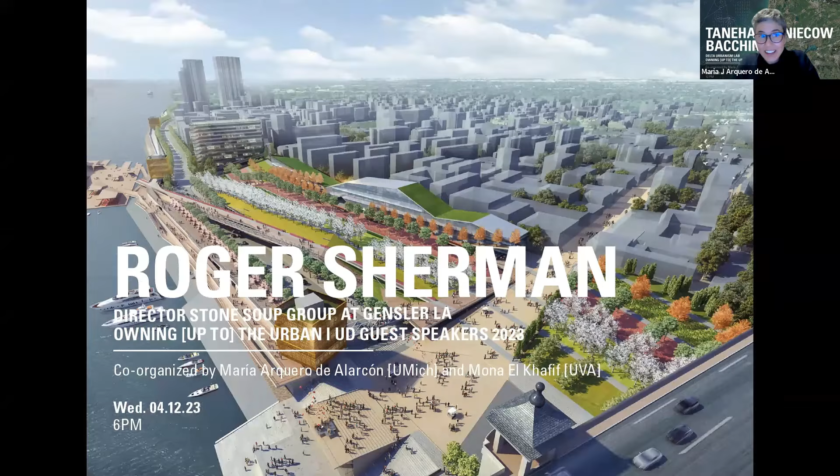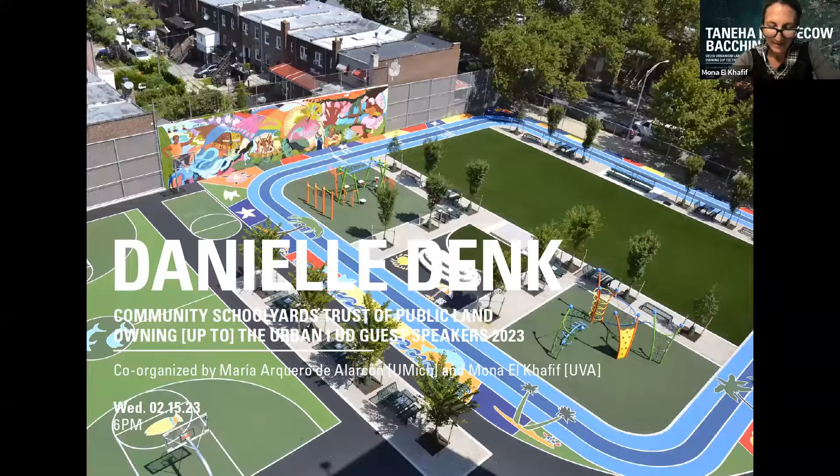So Mona, you can take it from here. Yeah, welcome everyone. This semester, we are specifically interested in featuring novel organizational infrastructures in which the design disciplines reassemble, and to devise experimental approaches in urban design to capture its complexity and uncertainty.

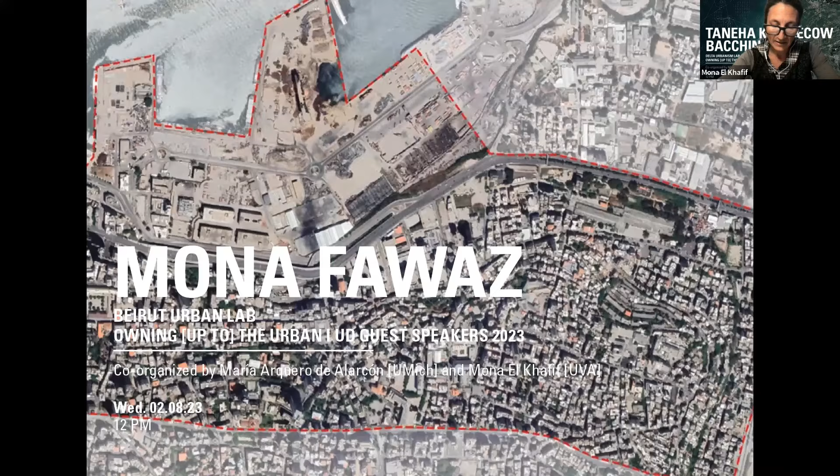This is the second lecture series. The last round, we were looking at and inviting colleagues, researchers and scholars who were implementing one-to-one projects. This year, we are inviting our colleagues from labs, very often embedded in the context of academic institutions, non-profit organizations, or large professional firms. Labs, centers and clusters are very often productive configurations where research methodologies and strategies can be experimented with, challenged and innovated.

So in our lecture series this year, we are going to be examining the formation of 7 organizational units, and you can see them rolling on the screen, starting today and going on up to 7 of them. And the guest speakers are going to be sharing with us what are some of the operational logics of these units, the work that is emerging from them.

We have invited them to discuss their projects in their temporal and spatial logics, how they are accessing funding and resources, and what are some of the strategies that they are using to engage diverse publics and ensure that they are advancing different strategies of co-production in many instances.

We prompted all speakers to address specific questions in their presentation. Among those questions: about agency, methodology, the actors that are involved, actions that they are taking, the way how their projects are funded, and how their work could be replicated in other places globally.

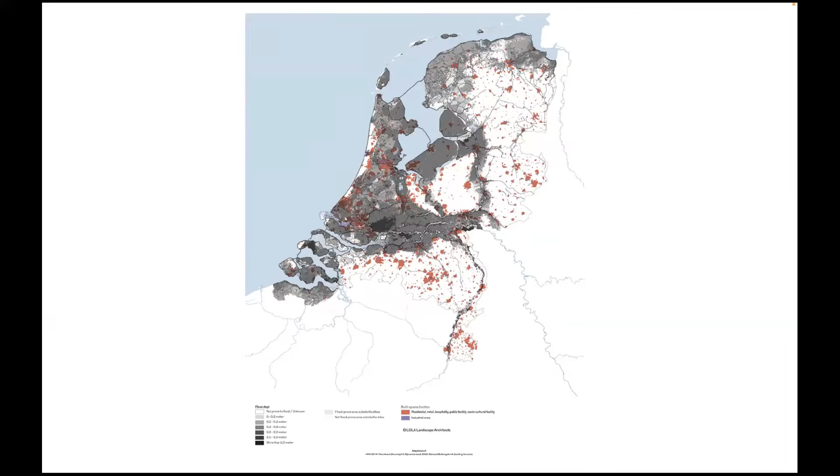...actually the sea level. So most of the country is under sea level, and you can see in red the urbanizational spots. The Netherlands is a very high density country—quite dense population, with 60% living under the level of the sea.

So in case the dike breaks, we do have quite a major problem. But at the same time, it's a very fascinating thing to be in the Netherlands, because you realize the Netherlands is a country that does not accept risk—we are a risk-zero country.

All the infrastructure has been planned to face a probability of an event of 2,000 years, meaning the infrastructure is extremely capable of pushing the water away from the country.

I have been living in the Netherlands now for 12 years. I never experienced a flood. I come from Porto Alegre in Brazil, where I had to learn how to drive when it was flooding.

So you are perhaps in the highest potentially risky country to flooding, but actually we do not experience flood. This is something that defines Dutch culture—to have the feet dry, the public institutions are responsible for keeping the country safe.

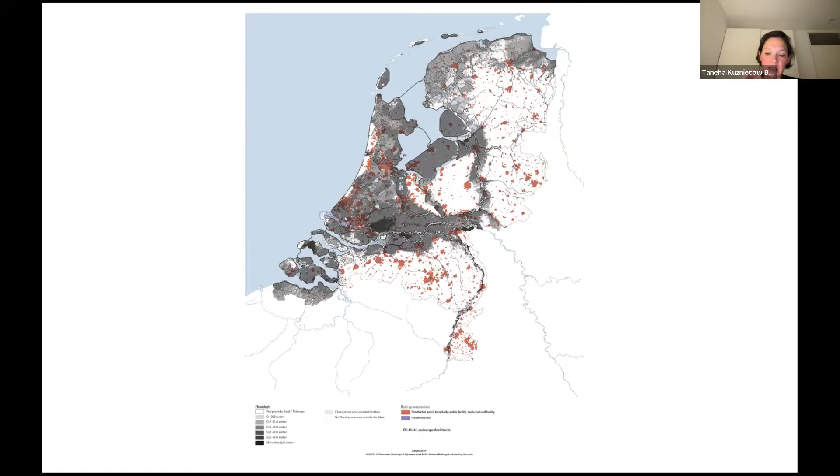In that sense, you can imagine the social resilience is quite low to that, because we are accounting for the public infrastructure to take care and keep risk levels very low. But of course we have climate change and the rising...

...sea level, of water levels, also especially from the rivers—so more discharge of water from the rivers is expected.

So nowadays, finally, the country is taking this risk question very much into the table of discussion, seeing what might be the future of the country, knowing we are facing very much this condition of the sea and the river taking major portions of what is now dry land.

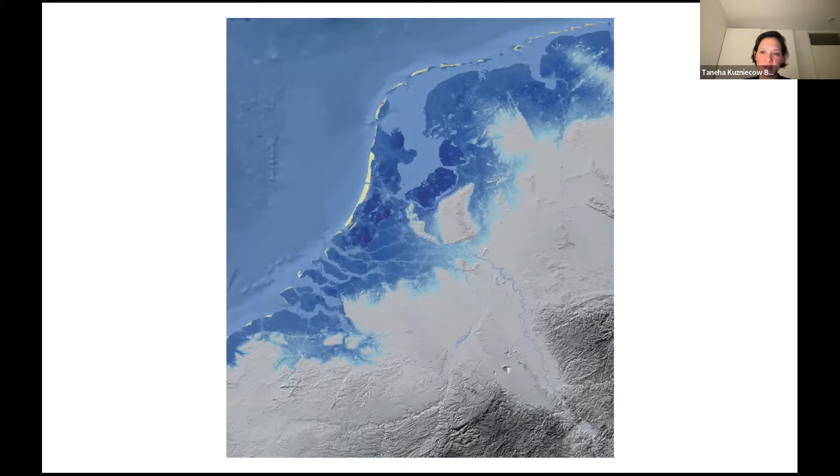So we are a risk society, and that's something that very much defines the society of the 21st century. And then put the question of the modern project again as a central logic, actually the logic of the modern project in question, especially thinking about moving from the rationality of the modern project, of the separation of things.

Of the different functions, and of keeping things under control by the power of infrastructure. Actually, how can we accommodate more instability, a higher state of fragility and uncertainty, by thinking about specific aspects of potential, embedded and implicit potential that perhaps now is not being used in its full dimension, but especially also the possible connections in place between different systems and different actors on the ground.

I brought two projects from the Dutch context, which I think are quite exemplary of this moving paradigm in the Dutch approach. So from the dikes and dams, this very high level of civil engineering to take the risk away, to actually accept natural processes and even to learn from them.

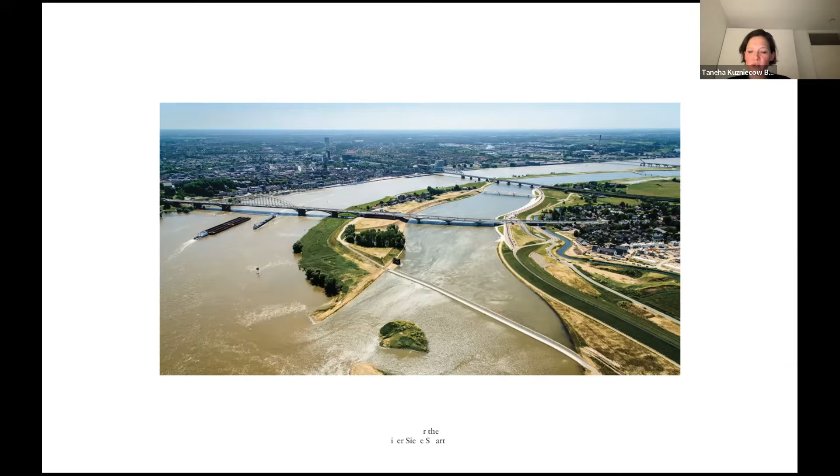So, for instance, through social media, newspaper articles, photographers going on the ground - very much this understanding of how their traditional landscape and traditional way of understanding water management would have to change, and what could be not only the negative consequences of losing land, but actually the beneficial outcomes of such a project on a national level.

So all of this now brings us to the question of extremes. We are finally entering very much this quest of extremes, as in approaching limit states, highest in degree.

The meaning of extreme implies a state of excessive degree. So how do we take this question of extremes into the rationality of the project? It really moves oneself away from what we know, so we have to embrace uncertainty to its full dimension. Unpredictability, disequilibrium, and strangeness become a sort of new normal. How can all of that be encoded and inform value making and spatial design?

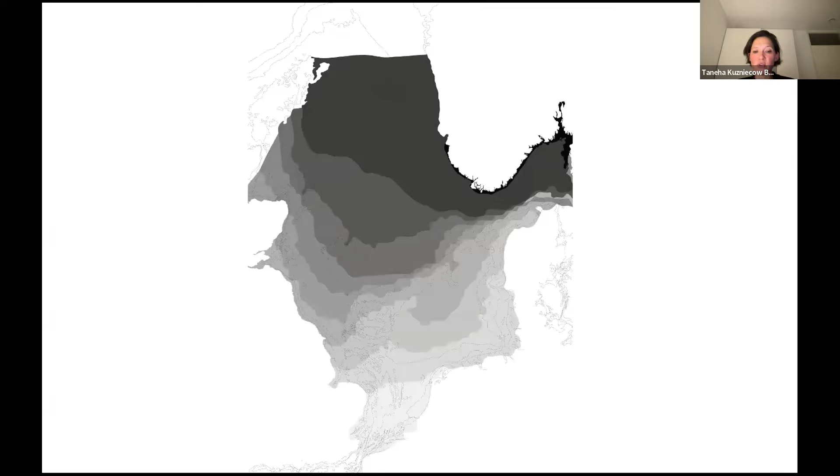Just to give an example, this is the map of the North Sea. We had a graduation studio that ran for 3 years on the North Sea, where we put forward the question of what is the new development logic of the North Sea, knowing the extreme conditions we might face in the future - political, economic, societal, and environmental. You can see here the map of the Netherlands in relation to the North Sea, and the UK in relation to the North Sea now.

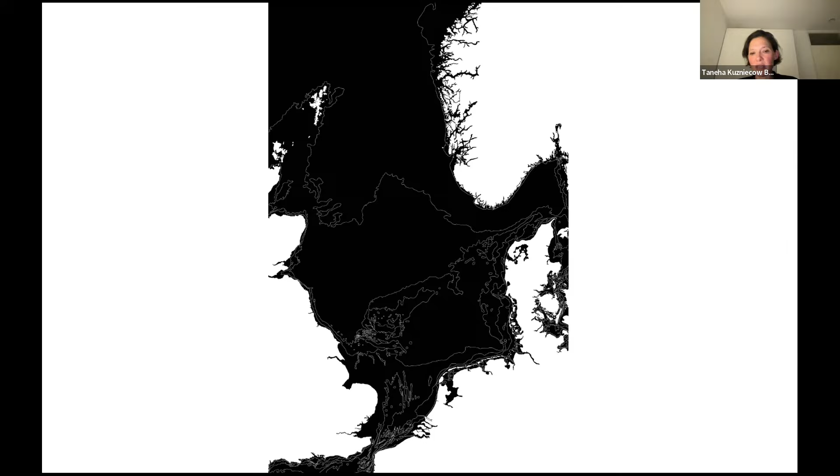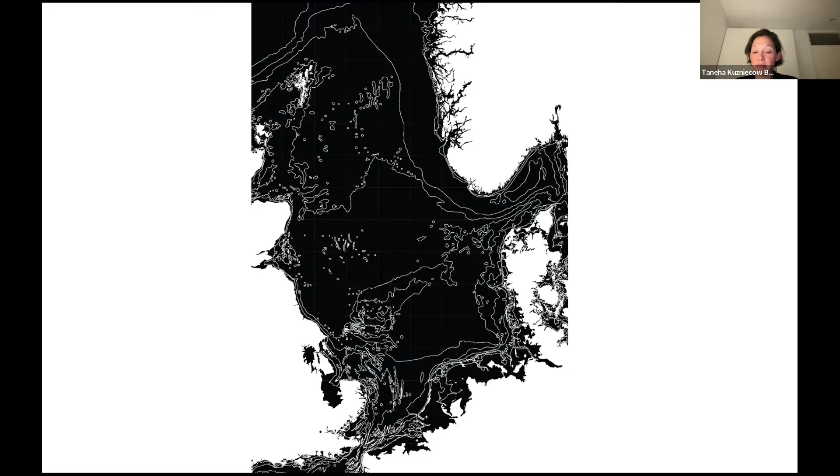With the changing climate, this is most probably what will become the map. You can see major parts of the Netherlands being flooded, but also the UK, London as well. So how do we go about it if this becomes the new map between sea and land? How does the project move alongside that? How will ownership, the notion of territoriality, infrastructure, and conditions of inhabitation in general move alongside this new map?

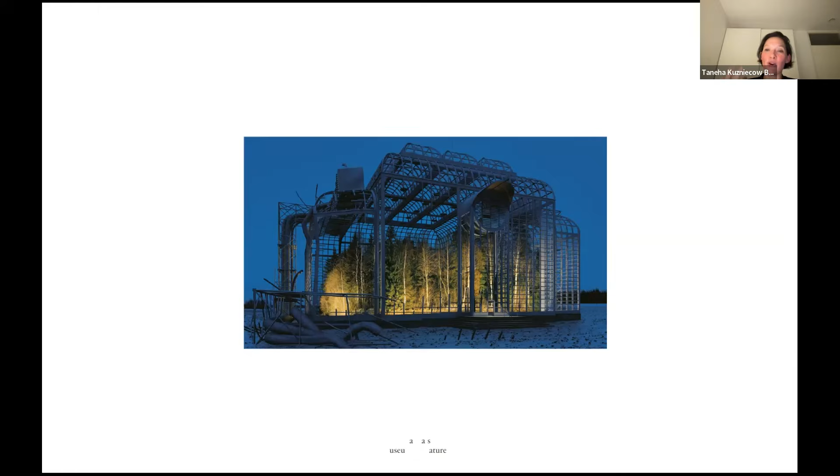So what are the consequences of that? What have we actually been tolerating? In the Netherlands, the soil is not used for production - the ground is only used as space, not as soil. So what may be the ethics of practice in the future if we have to foster more constructed nature? How do we go about that?

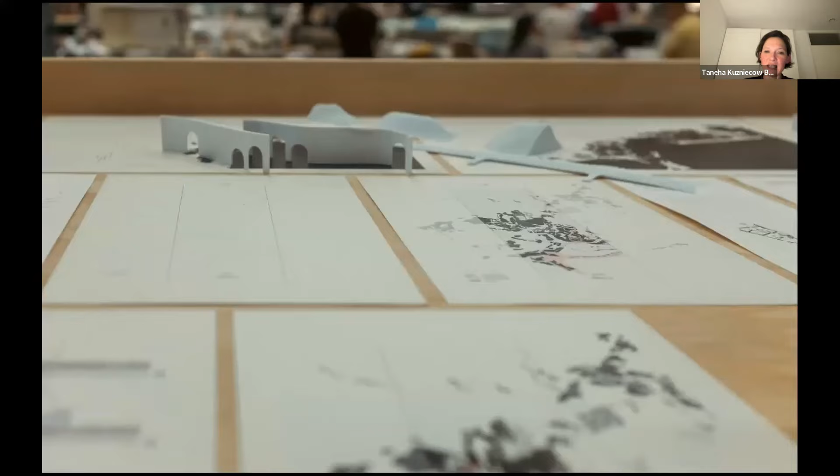They have 1 year to develop the final thesis. The studio is called Transitional Territories, and it has been very important and informative in what we put forward more concretely in our research projects - this movement between scales of design, from the very large territorial scale, for instance at the North Sea level, down to the very fine scale of architectural objects, and the implications of that.

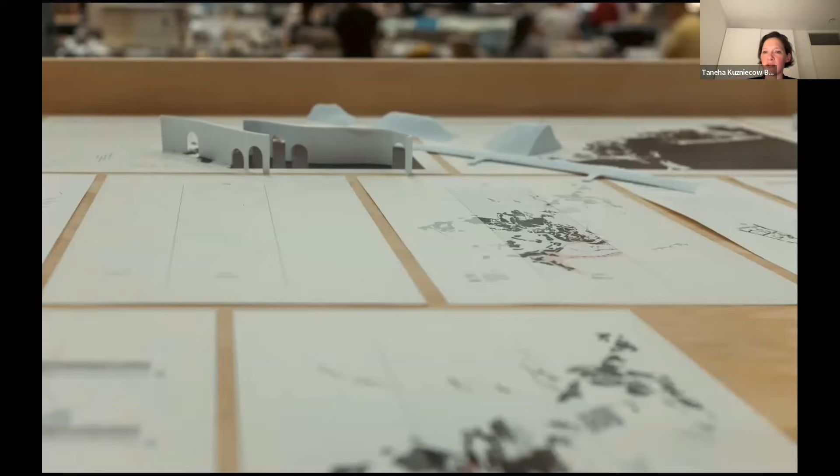We aim to develop a practice that is as material as possible, situated to the contexts that the students are working in, or that our research projects engage with - understanding this idea of moving through different scales in time and space, understanding past values and conditions, informing and grounding the present, and then how we anticipate the future.

So this is also just for you to see the inside of the faculty. This is our model hall, and it's a very lively space.

Something that has also been very important is the use of different media, so making documentaries—students have been quite engaged in that. Of course, working with different physical models and materials, but also workshops and interviews with stakeholders. So we have been playing out with the use of different media in that.

So here I start with the projects. How much time do I have left, if I may ask? 10 minutes max. Okay, then I'm gonna jump between things.

To start with this one, this was a project we developed between 2013 and 2017. It's a Joint Programming Initiative. Within Europe we have different types of funding, and this one is quite special because it's very much about cities—the focus is on exchange between cities in Europe. We also have Horizon Europe, which is a much broader type of funding scheme.

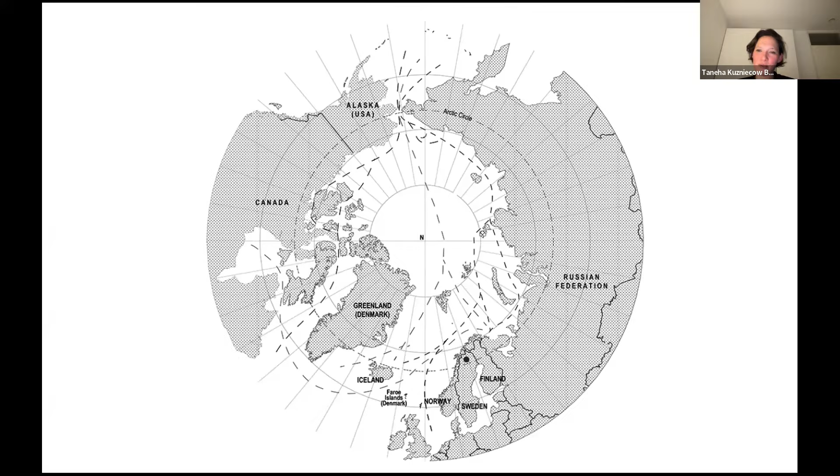Kiruna was the main living lab. It's a city located in the Arctic, 145 kilometers north of the Arctic line. It's the biggest municipal area after Mexico City, but one of the lowest density places—2 inhabitants per square kilometer. It's a city founded because of mining; it's the biggest iron ore mine worldwide. It's this mining city, and recently they found even more minerals, so it's a very rich underground site.

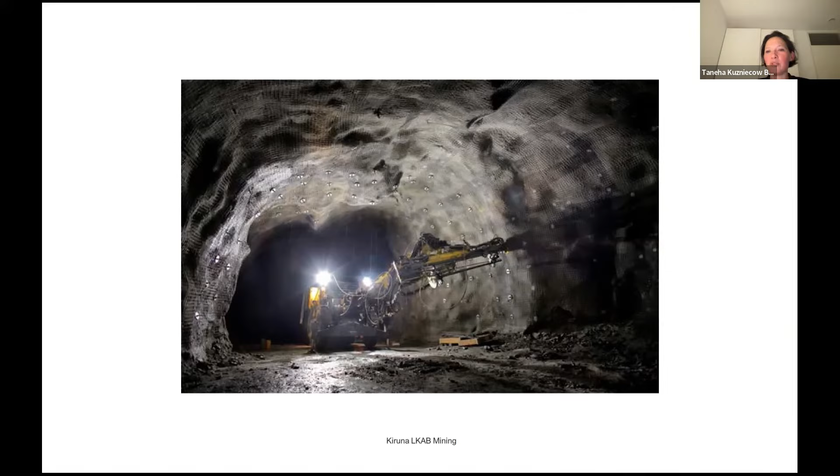So Kiruna is a perforated landscape, and the reason for this perforation actually led to the point that the city has to move—the city is sinking, as are other small towns nearby. The Kiruna municipality put the question: we have to move the city, because the existing city is very closely connected to the mine, and especially the core was sinking. So the full city has to move 3 kilometers eastward.

A design competition was launched in 2014, and we came in as a research project to envision what could be, since they have to move the city—developing a new master plan and figuring out how to go about a green-blue development of that new city.

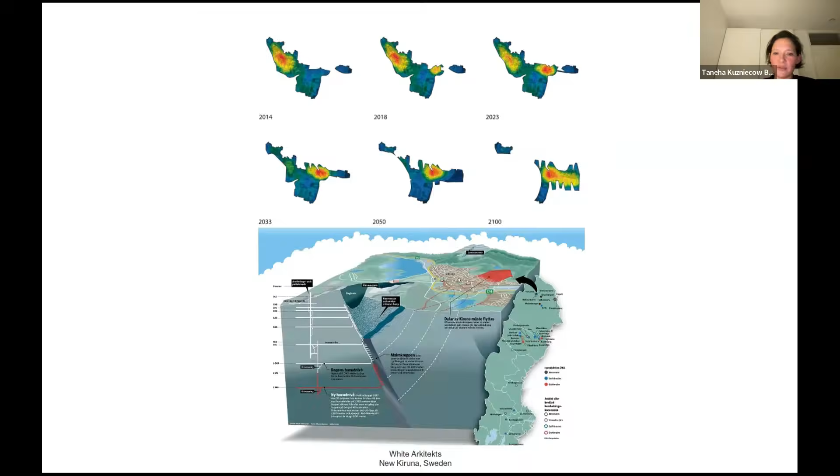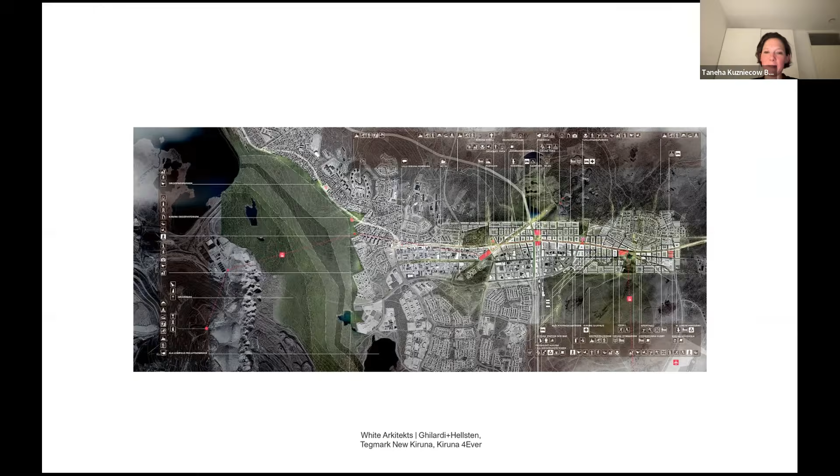This was one of the first master plan designs, but the master plan kept on moving throughout the years of the project. From the existing town, the city is being moved 3 kilometers eastward, and some historical elements—the church and important homes of architectural heritage—were literally lifted and moved to a new plot.

But the infrastructure, especially the drainage infrastructure, had to transition from its existing location to the new one. When we as researchers involved in the project faced this question, we realized how you can actually design a green-blue infrastructure in a city that is covered in snow 9 months a year.

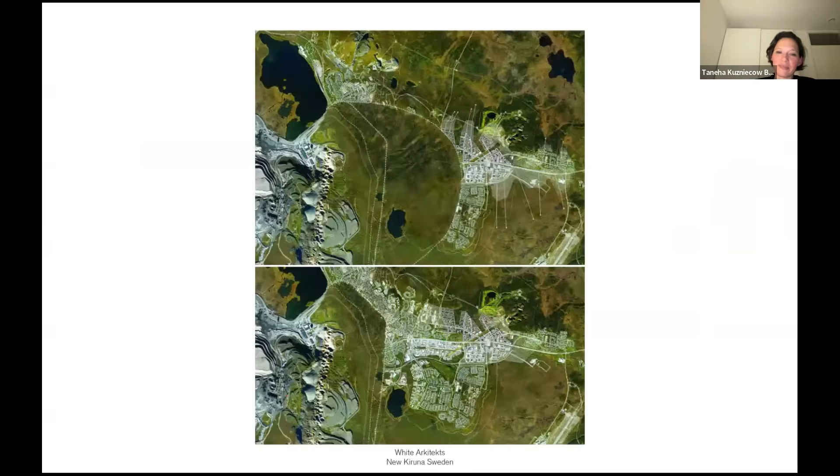Green-blue infrastructure is about the conveyance of water by means of vegetated spaces, so when you do have precipitation—but precipitation here is actually snow and ice—then how do we go about it. This led us to really enter this puzzle and think about this kind of land, water, snow script.

So how could we think of the relationship between land, water, and snow? So that would be then a green, blue, and white infrastructure, moving between these two very extreme conditions of life throughout the season. You have 9 months of snow, and here in Kiruna, there is the midnight sun. Then in a very short period of time, a month, you have the full blooming of spring and summer, and this wonderful green landscape that lasts for 3 months. So how do we go about the use of these two seasonal variations?

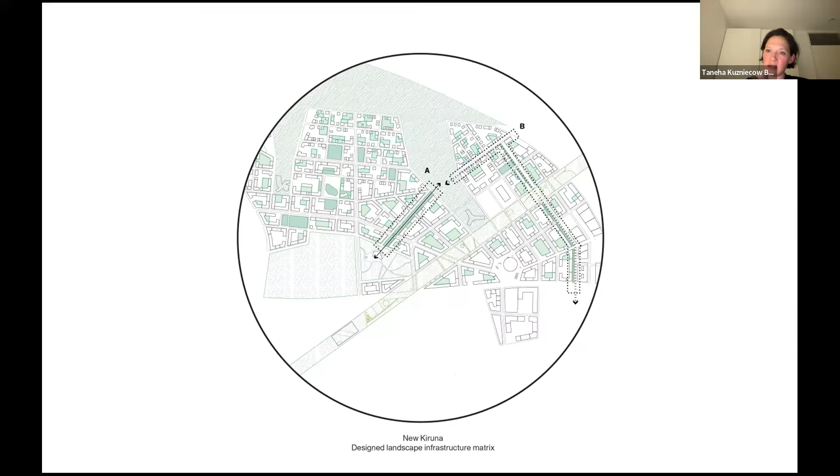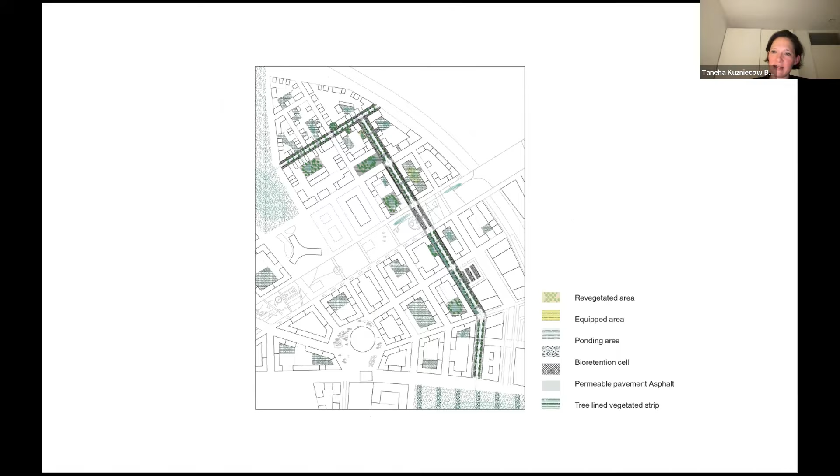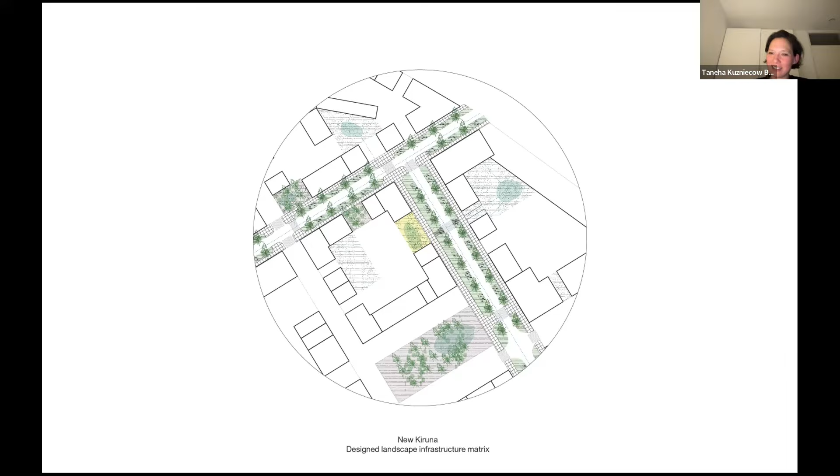Without going into much detail, we envision this in the new master plan and design: what would be the most important paths of water in the city, out of topographical and topological conditions of the site. Then zooming into the neighborhood and district level, how could the design of public and private space accommodate this flow of snow, melting water, and rain? It's all about coding of land use, land form, and land cover to accommodate these different levels of precipitation throughout the seasons, and the distribution of that volume. This came through very much, and I think here especially, this was quite telling.

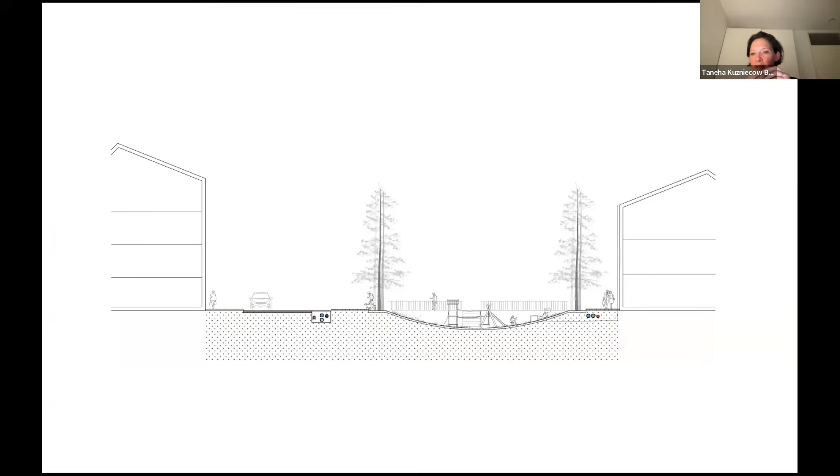This comes to the question of relationship, how can we actually understand relationships and dynamics in a place between different systems, elements, subjects, and values. This question of infrastructure ecology made us understand that we need to couple the drainage infrastructure with district heating. If we envision a system that could combine different types of infrastructure - electricity, district heating, and drainage - the excess heat from electricity and district heating could help melt the ice forming on sidewalks and streets, helping us drain water more efficiently, especially during the transition from iced to de-iced conditions. That idea of infrastructure ecology, the coupling of different infrastructural systems, was quite important.

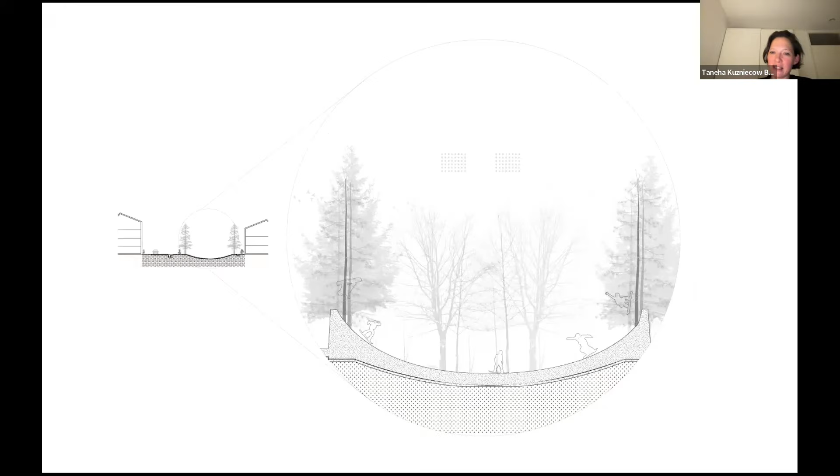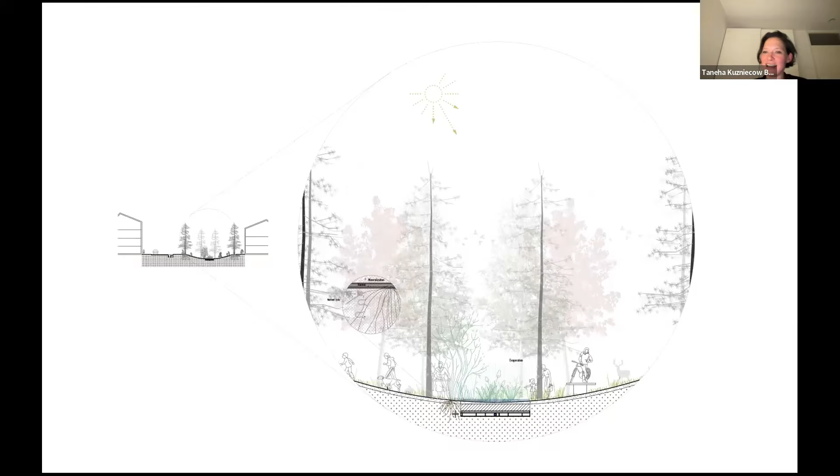And then the multifunctionality of that was also very important, especially in close connection and consultation with stakeholders and users - how do they use the space? We found out that even though the city is completely covered in snow, public life doesn't stop existing - it exists quite a lot. For instance, here you can see a half pipe made out of snow, which is quite normal. There's a lot of sport life happening in the public space of the city. So how could we envision space in the design that accommodates these different seasonal uses and their performance?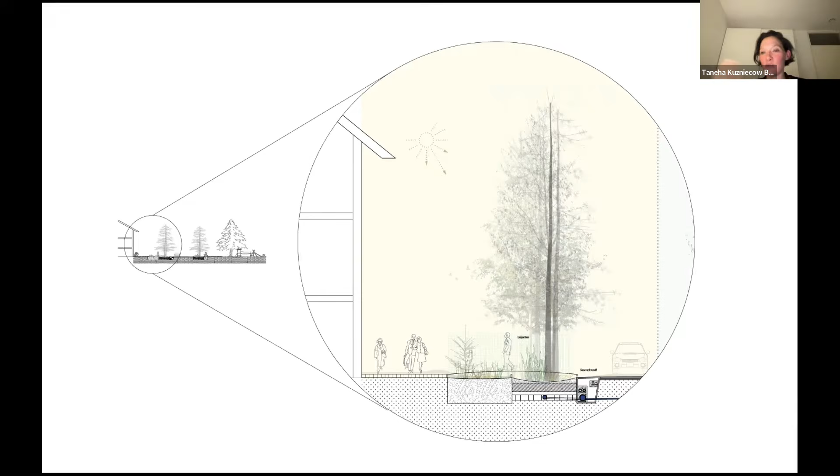Section-wise, I think this project was very much about understanding section - how we go about the technical sections, and how those technical sections, alongside the cultural understanding of the use of space, could lead us to design the full landscape, a network of green, blue, and white in that context of places.

So I don't know if maybe I can just jump to the very final one, which is the Indian project, and then we can conclude. Going back to the title, this search to situate is what really informed this project, called Water for Change.

It's a bilateral cooperation between the Netherlands and India. It was a very interesting project because the consortium was formed out of a sandpit process - a call for individual researchers to apply. We were selected, 15 in the Netherlands and 15 in India, and brought together to Delhi for 4 days of a sandpit, a full immersion, in which the panel gave us exercises, and most of us didn't know each other. Out of those exercises, being in a sandpit, we formed groups - fascinating because the groups formed out of affinity in terms of ways of thinking, value assignment, ethics in practice, and so on. Out of this sandpit, 3 groups were formed. We went back home, developed the full proposal, and we were lucky enough to be the group selected.

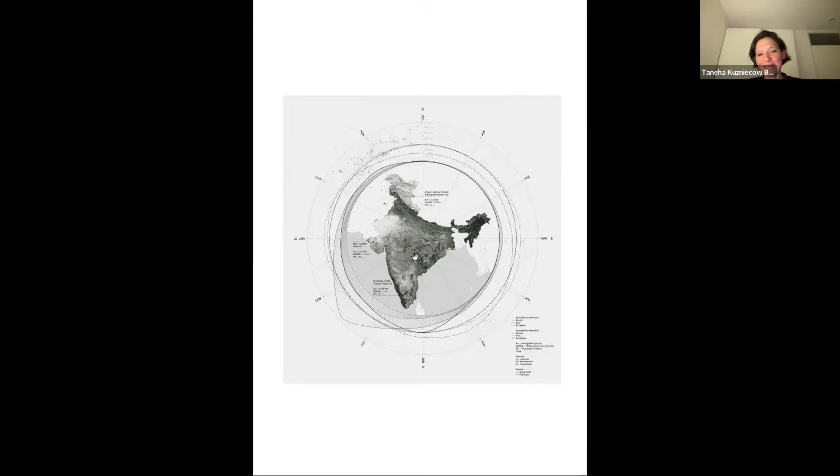So this is India, and those are our three cities. Bhopal, which is a city of lakes, a very common type of urban condition for secondary cities in India.

Then we have Bhuj, which is an arid city, extremely interesting and fascinating, with vernacular water infrastructure at the catchment level. And then finally Kozhikode or Calicut, on the coast of Kerala. So we have an arid, a coastal, and an inland lake type of city.

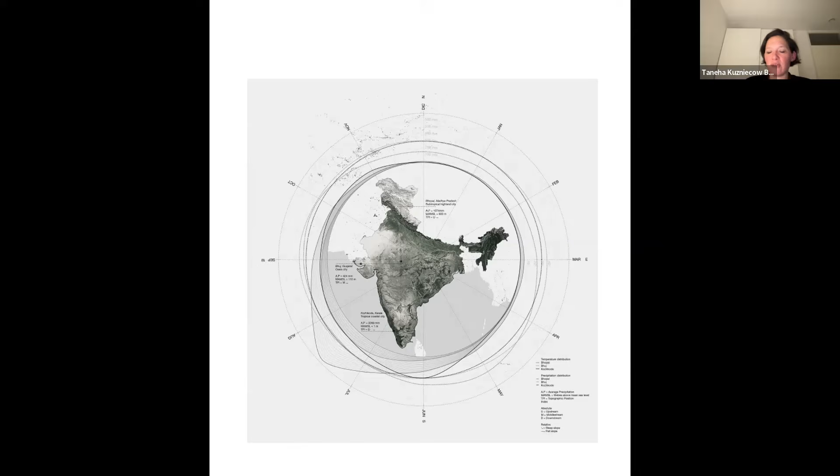The combination of the three cities - we chose them because they are archetypical in terms of climate, environment, and culturally very rich, diverse cultural and language conditions. So the combination of the three could give us a good understanding of the more general condition of secondary cities. It's a sort of strategy for upscaling: to be minimal in selection of cases, but to understand what are the most archetypical cases for upscaling. And then just to conclude, again, the moving between scales.

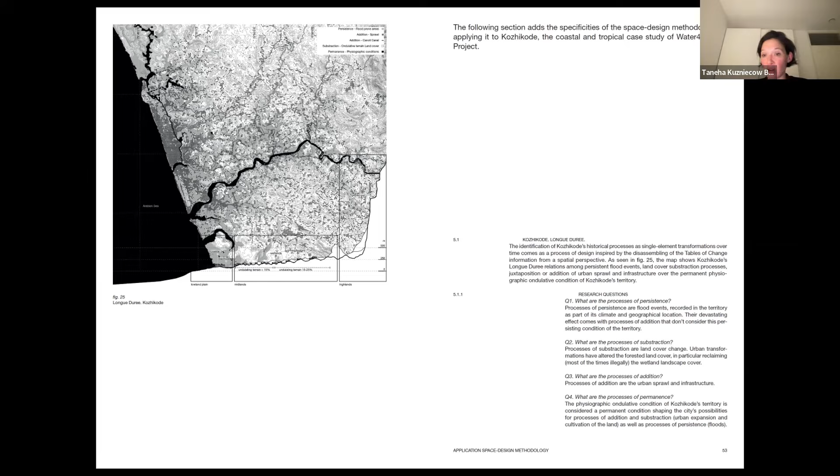So this is just the city of Kozhikode. The understanding of what is the territory of Kozhikode is beyond the catchment, the river basin catchment. That's something that also takes other portions into place from an ecological and cultural perspective. So how do we define what is the territory from an ecological, hydrological and cultural perspective? What is the juxtaposition of different landscapes and ways of living and using practices, down to moving from a territorial scale to the ensemble scale, meaning the habitat around a certain practice in relation to water.

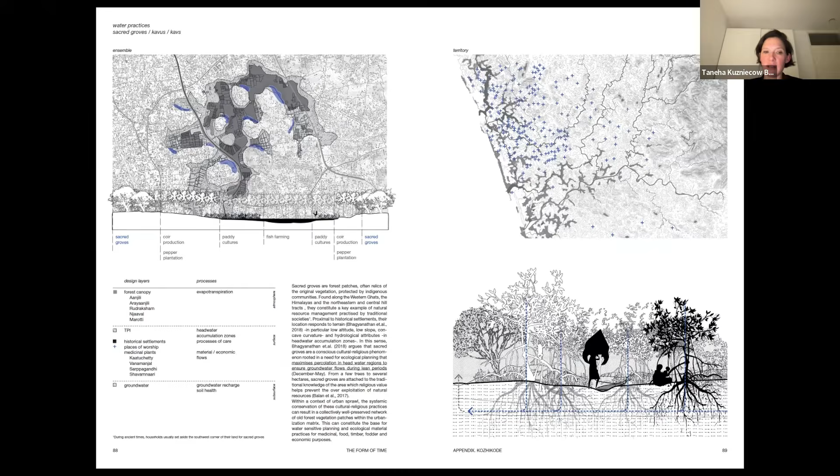I'm going to show you here traditional practices, these are the sacred groves. Wetlands which are considered sacred are kept pristine because of the very important religious connotation they have, and especially what you can see here, the mangroves. There's a very close connection between cultural and religious practices and natural protection in that sense. You can see the specific type of practice, the landscape or ensemble around that practice, and its position throughout the territory.

This is another type of practice, the pepper plantation, also very important—it's a city of spices, Kozhikode. This has traditionally been quite knowledgeable of soil conditions, giving back to the soil after plantation as a way of keeping the cycle of restoration of soil and water.

Also the paddy cultures, very important in maintaining buffering capacities between land and water, and the cultures of fish farming, and how they've gone about understanding the specificity of the landscape, the protection of the landscape, and how much the fish farmers have been impacted by urbanization processes throughout the region.

So this is the final slide. The most recent form of practice is the Canoly Canal, cutting through the city but also quite important in connecting these different traditional practices, perpendicular to the coastal space. This has been our effort until now—to really read site-specific water practices and the logic of their development through time, from a political, social, cultural, environmental and economic perspective, the play between these domains, and how we could go about a new design that would take everything that exists and understand it from a systemic dimension.

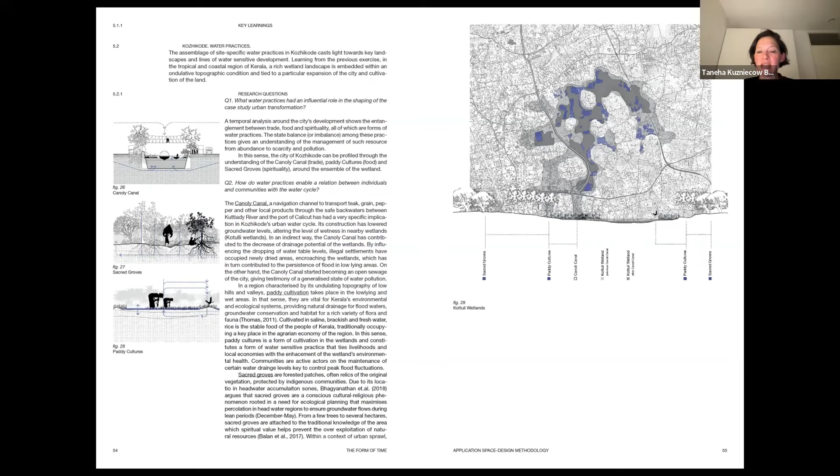So what could be the scope of adaptation, of reparation, of fostering these existing practices in new locations, or even the implementation of novel practices which are necessary to cope with especially the urgencies, but also the uncertainties in the future. And that was my thank you.